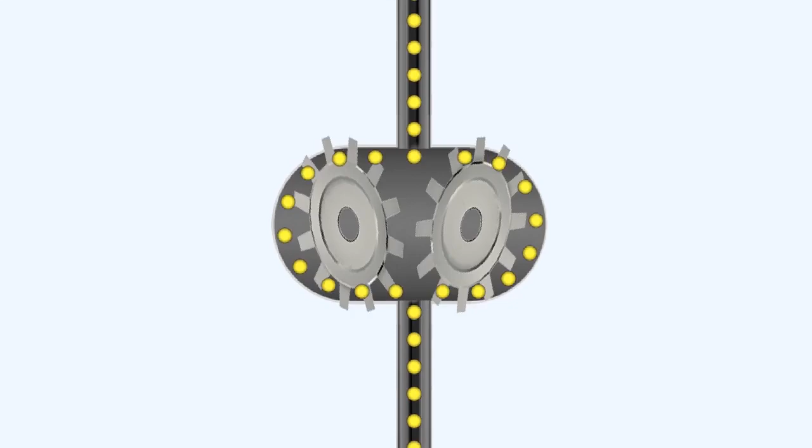The oil pumps, both pressure and scavenge, are fitted on the accessory housing. They are fitted within an oil pump pack, which consists normally of one pressure pump and perhaps as many as 7 scavenge pumps. Having several scavenge pumps ensures that the lubrication system remains a dry-sump system.

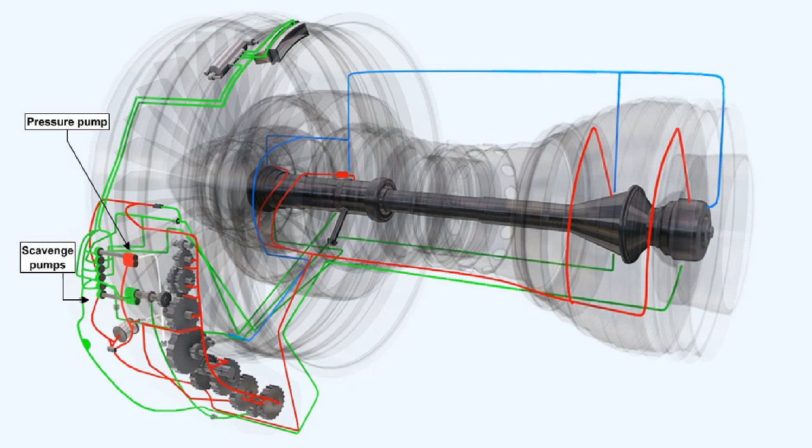Oil coolers can be either air-cooled or fuel-cooled. We've seen that some engines use both systems. If an engine does use both air and fuel to cool the oil, temperature can be monitored electronically, and the air cooler switched in only when it's deemed necessary. The oil temperature is maintained at a value which helps to improve the thermal efficiency of the engine.

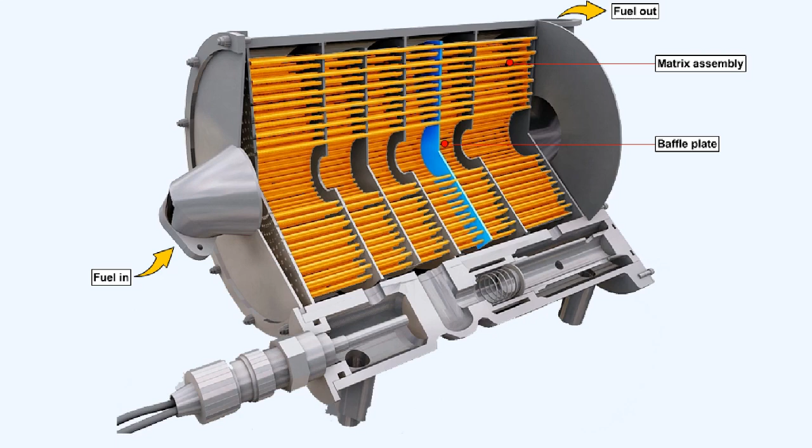Whether it is fuel-cooled or air-cooled, the oil cooler is basically a radiator, which exchanges heat from one medium to another. The oil cooler consists of a matrix assembly, which is partitioned by baffle plates. The baffle plates ensure that the oil takes the longest path through the matrix, and it thus gains maximum benefit from the cooling effect of the fuel flowing through the tubes within the matrix.

The fuel-cooled oil cooler has a double benefit. The fuel in the aircraft wing tanks is invariably very cold, and requires warming up before it gets to the fuel filter. The oil is hot and requires cooling. This device allows both requirements to be carried out within it, a rare chance of achieving 2 for the price of 1.

Incorporated in the fuel-cooled oil cooler is an oil bypass valve, which is fitted across the oil inlet and outlet. If the oil cooler becomes blocked, when the oil pressure in the cooler inlet zone reaches a predetermined value, the oil bypass valve communicates directly between the oil inlet and the oil outlet. This will prevent oil starvation in the engine, and will also preclude the chance of excess oil pressure damaging the relatively fragile matrix assembly.

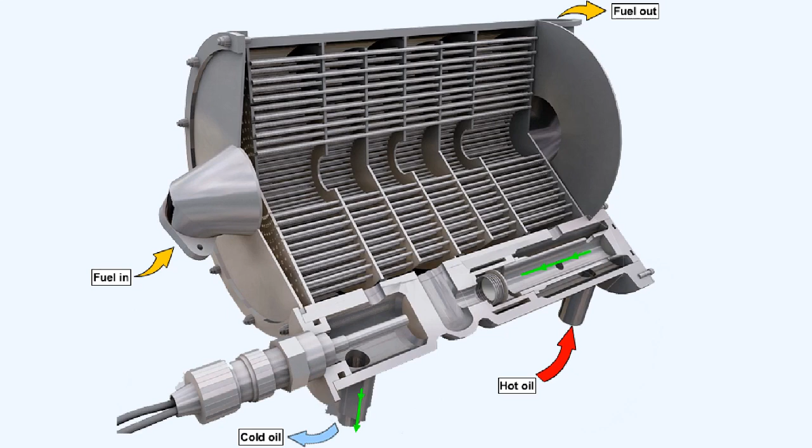In the event that damage to the oil cooler matrix does occur, fuel is prevented from entering the oil system by the oil pressure being kept at a value higher than the fuel pressure. This is done by a pressure-maintaining valve located in the oil feed line to the cooler. Thus the oil will leak into the fuel system rather than the other way round.

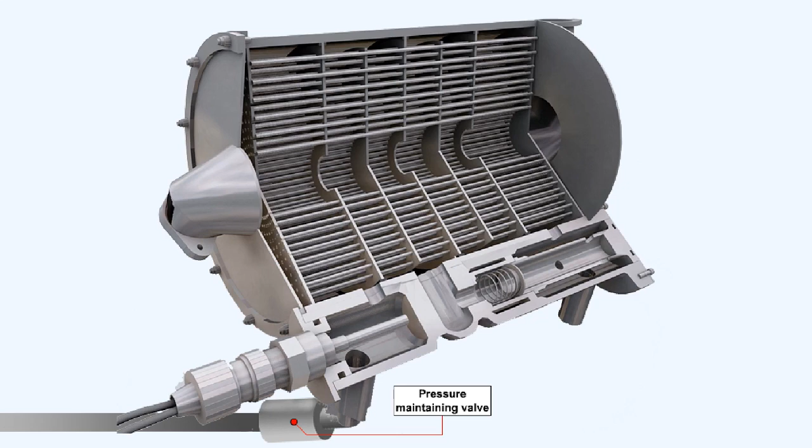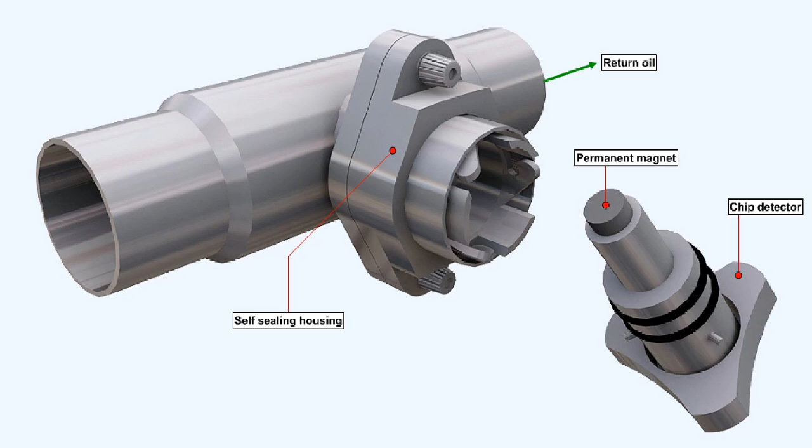Chip detectors, which are permanent magnet plugs, are situated in some of the scavenge lines to collect ferrous material from the oil as it returns to the scavenge pumps. The chip detector is retained in the pipeline by a bayonet fitting within a self-sealing housing. The fact that the valve housing is self-sealing means that the detector can be removed without any loss of oil.

Contamination of the magnet by iron filings is illustrated here. This type of contamination can be taken as evidence of impending failure in the bearing chamber, which is being monitored by that particular chip detector.

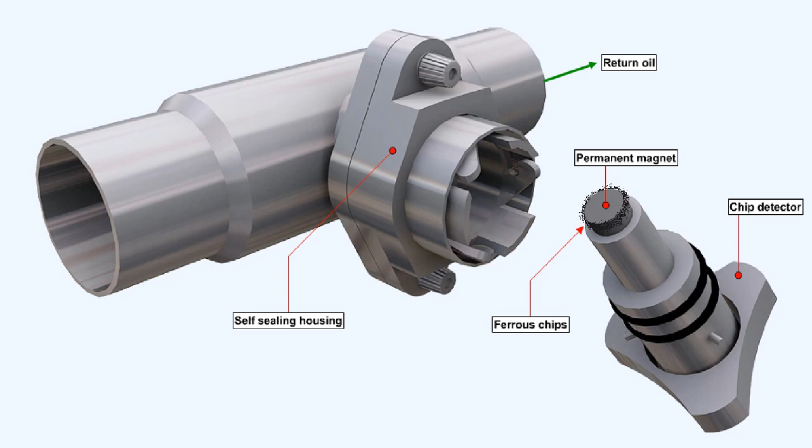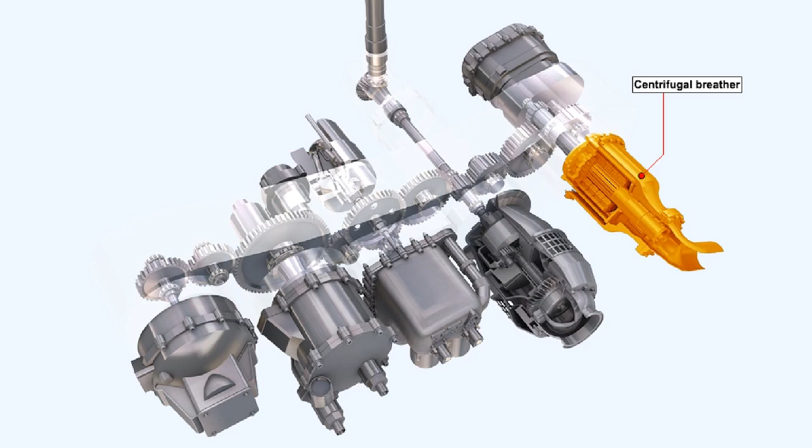We've already stated that to prevent excessive air pressure within the accessory drive unit and the bearing chambers, the interior of the engine must be vented to atmosphere. Airborne oil droplets in the air within the engine form an oil mist which, if it was allowed to escape unhindered, would rapidly deplete the engine oil contents. The oil mist is vented to the accessory drive unit, where it must pass through the centrifugal breather before reaching the atmosphere.

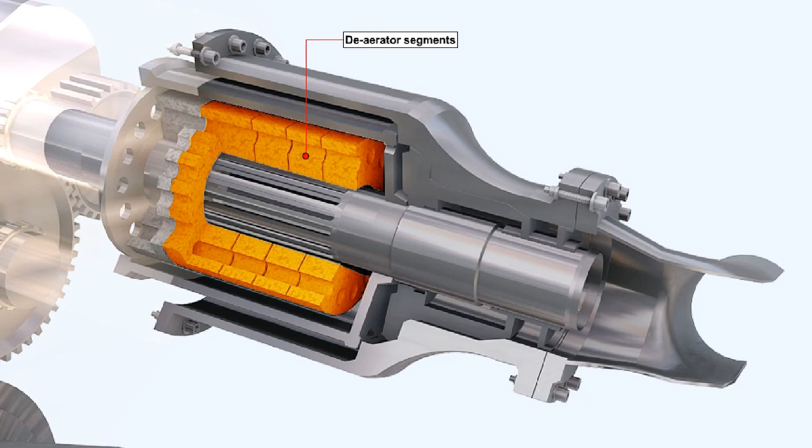The centrifugal breather is rotated at high speed, and as the oil mist enters, it's thrown outwards by centrifugal force. Around the inside periphery are de-aerator segments. The oil is separated from the air and is eventually flung back into the accessory drive unit to be picked up by a scavenge pump. The air, having less inertia, makes its way out of the center of the rotating portion of the breather to atmosphere, having had all of the oil removed from it. Thus the centrifugal breather minimizes oil loss in the gas turbine engine.

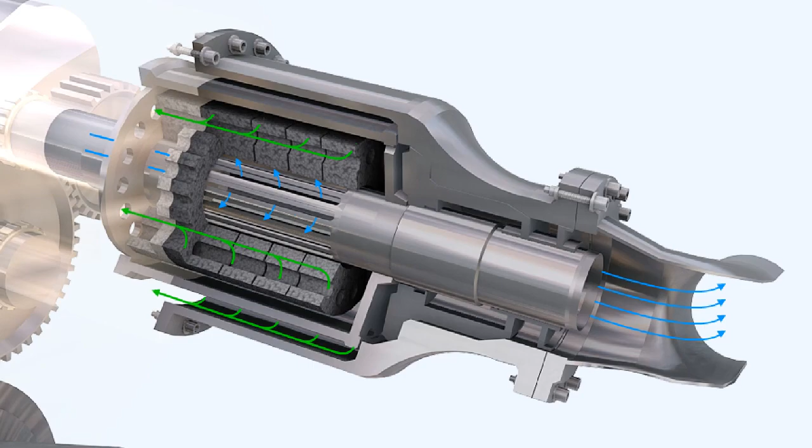To facilitate the oil's task of cleaning, a number of filters and strainers are positioned within the lubrication system. The filters and strainers prevent debris and foreign matter from being continuously circulated around with the oil.

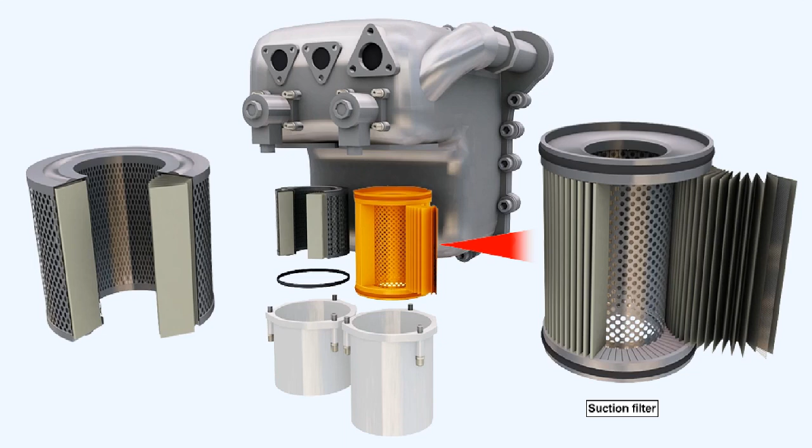As we described earlier, the oil is drawn from the oil tank through a suction filter before it goes into the pressure pump. The suction filter takes the form of a coarse strainer, which prevents debris being drawn into the pump and damaging it.

At the outlet of the pressure pump, a pressure filter is fitted. This is a very fine mesh filter, which will retain any small particles which might block the oil feed jets. Thread-type filters perform the function of a last chance filter immediately prior to the oil jets.

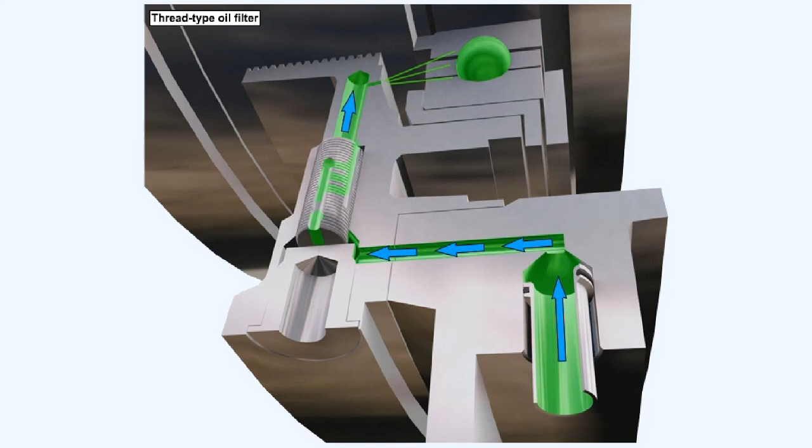Each return oil line contains a scavenge filter just downstream of the magnetic chip detector. These scavenge filters will collect any debris returning from the bearing chambers.

Both pressure and scavenge filters are constructed in a tubular form from either a very finely woven wire cloth or resin-impregnated fibers.

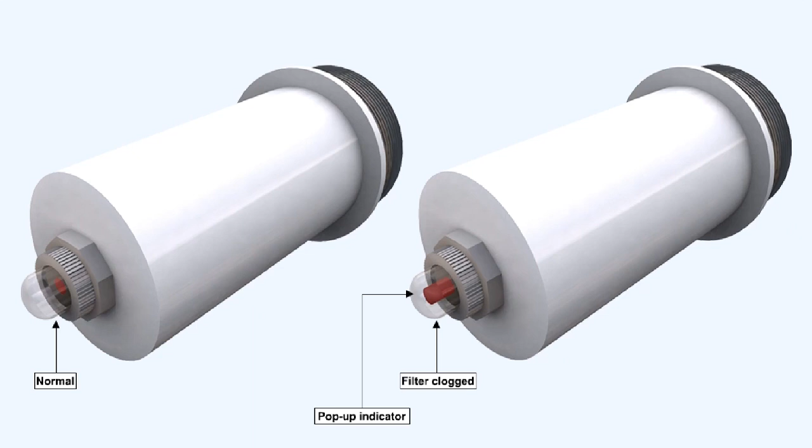Some filters may have a differential pressure switch fitted across them, or alternatively they may be fitted with a pop-up indicator, a small button which can be seen protruding from the filter casing to give a visual warning of a partially blocked filter.

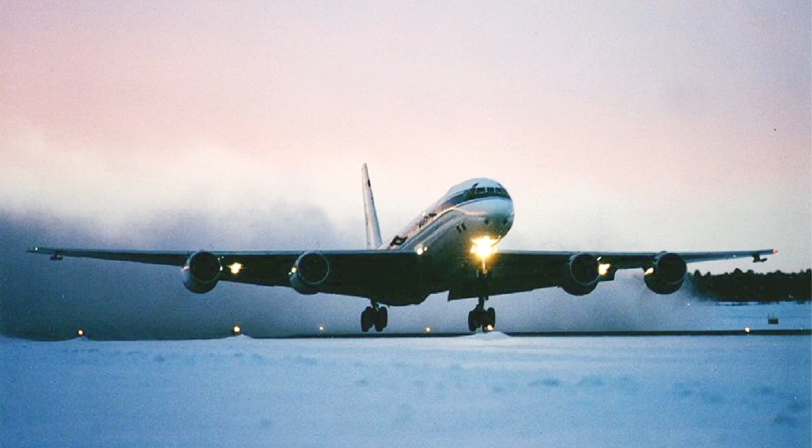Gas turbine engine oils must have a high enough viscosity for good load carrying capacity, but they must also have a sufficiently low viscosity to ensure a good flow of oil at low temperatures, as would be the case, for instance, when starting after a prolonged cold soak.

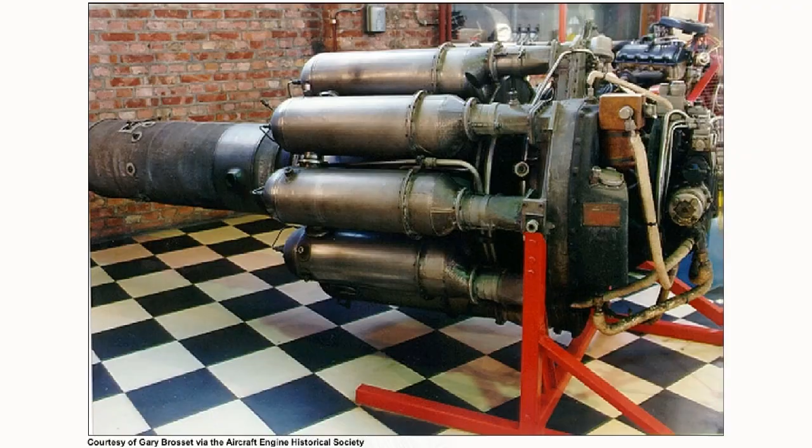Early gas turbine engines used the same oils as had been used in petrol engines for years. These oils were mineral-based. It was found that under the higher temperatures and speeds at which gas turbine engines operated, mineral oils burnt, scummed, and oxidized.

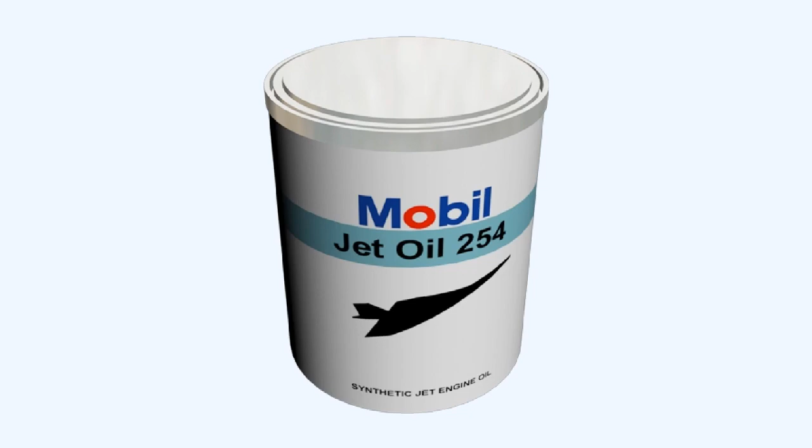To attain the properties mentioned at the beginning of this lesson, synthetic oils were developed. Synthetic oils have the following qualities: low volatility to prevent evaporation at high altitudes,

a high flash point which will prevent the lubricant igniting at high temperature points within the engine, such as at the turbine bearings,

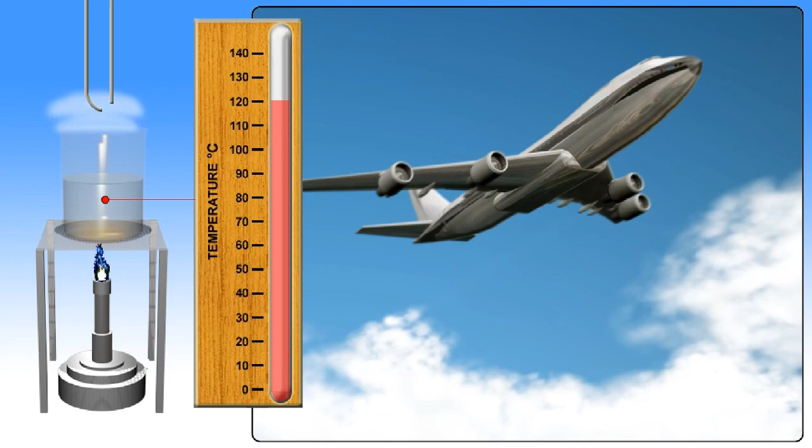a high film strength which gives the oil molecules the ability to stick together under compression loads and adhere to surfaces under centrifugal loads,

a wide temperature range. Most gas turbine lubricating oils have a temperature range of minus 45 degrees Celsius to plus 115 degrees Celsius.

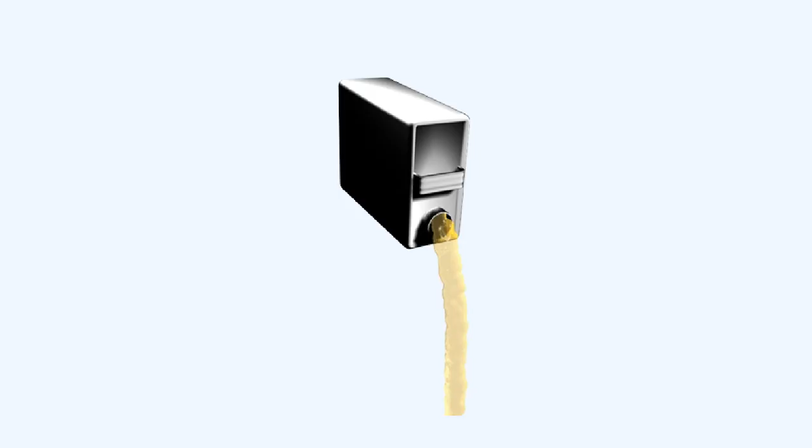A low viscosity, which increases the ability of the oil to flow under low temperature conditions. A high viscosity index, which is an indication of how well the oil retains its viscosity when heated to its operating temperature.

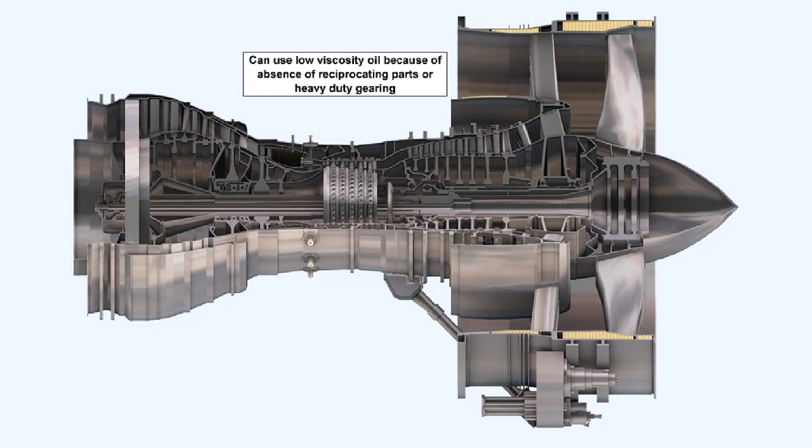Low viscosity oils can be used in gas turbine engines because of the absence of reciprocating parts and heavy-duty gearing. However, turboprop engines, which have reduction gears and propeller pitch change mechanisms, require a slightly higher viscosity oil.

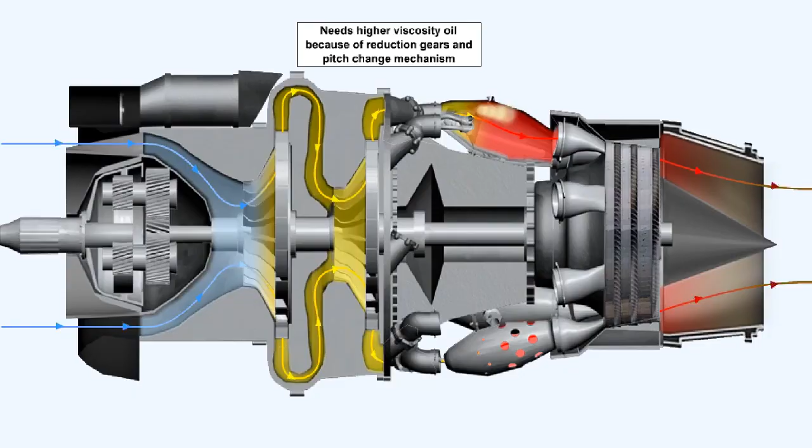Gas turbine engines are invariably dry-sump engines. The oil level of a dry-sump engine should be checked immediately after engine shutdown, or at least within a specified time after engine shutdown. This concludes the lesson on lubrication.